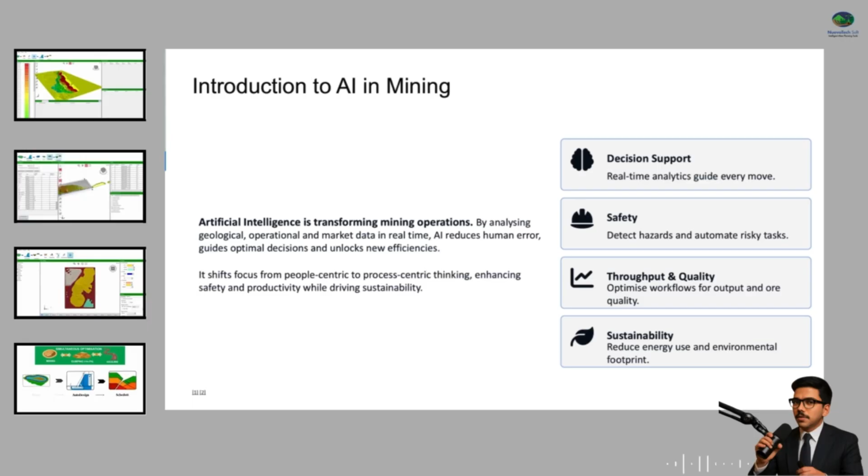We use machine learning to pattern match across geology, equipment telemetry, and market signals. Two outcomes matter: safer people and better cash flow. The rest, faster decisions, fewer surprises, smaller footprints, flows from those two.

Leaders have already proven the value. Rio Tinto's autonomous systems have cut fuel use on haul trucks by about 13% and boosted productivity with autonomous drills by roughly 10%. A reminder that smarter decisions add up at scale. And in exploration, Goldcorp's collaboration with IBM Watson at Red Lake showed how AI can highlight new drill targets alongside traditional geologists' plans.

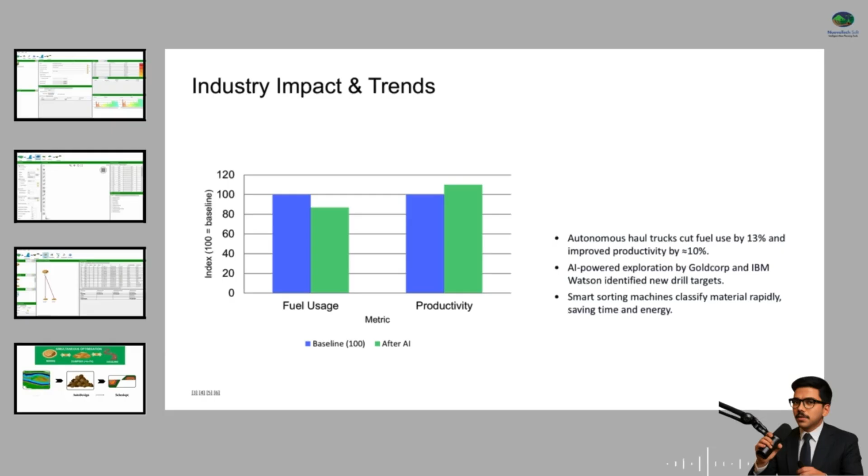Let me start with a night shift memory. Storm hits, internal dump is shut. Old me opens Excel, chaos. Now, we open SchedOpt. We regenerate paths, flip a few toggles, and the solver reroutes waste to an external dump, nudges stockpile draw to keep the plant happy, and respects gradients we set. Result: operators get a clean, updated plan before the tea gets cold. Tons, steady, zero drama.

Here's my plan for the next few minutes. I'll go from geology to cash flow in one pass, find value with PitOpt, turn shells into real designs with AutoDesign, schedule and route with SchedOpt. Stop me if I slip into jargon, I'll keep it simple.

At NuevoTech, we turn those pillars into daily practice using MineOpt, our strategic planning suite with 3 modules. PitOpt for economic shells, AutoDesign for rapid pit dump designs and mining solids, and SchedOpt for schedule optimization that includes dumping and haul, road selection to maximize NPV.

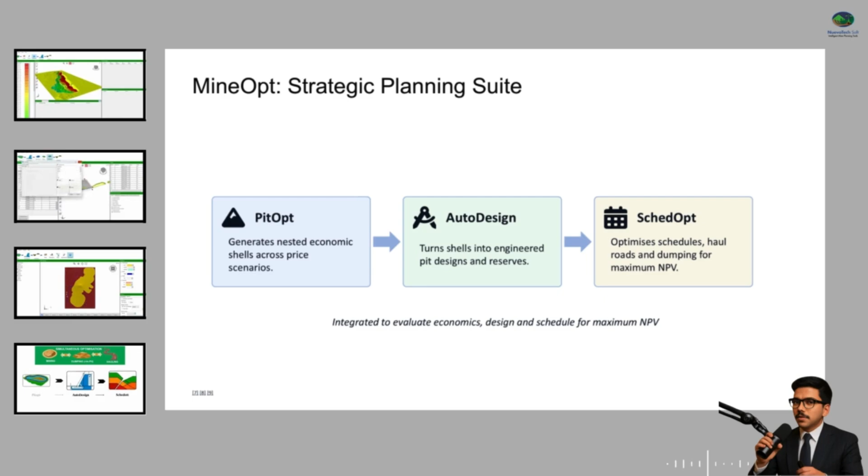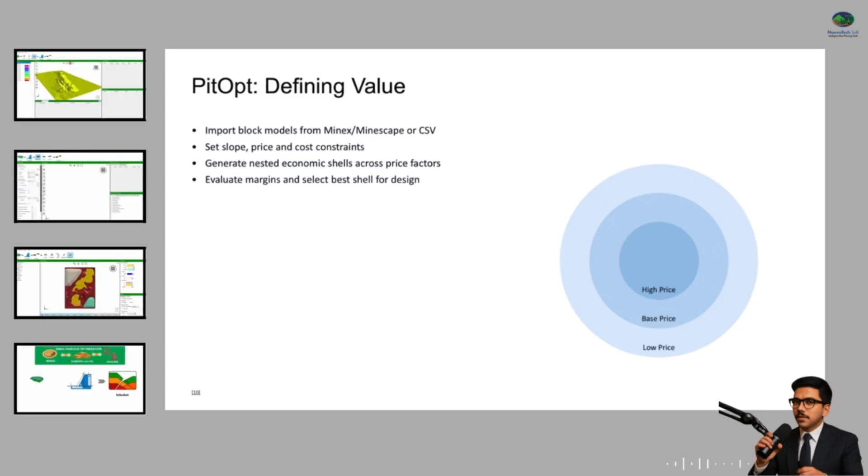I always start with economics, not geometry. In PitOpt, I point to my block model, or Minex or Minescape grids, pick density, grade, yield, and set my price, wash cost, and slopes. Then I press go. PitOpt builds nested shells across price factors. Think of it as trying scenarios quickly. What if prices dip? What if they rise? I pick the shell that balances value and practicality. That's our truth source for design.

Shells don't move rock, designs do. In AutoDesign, I choose the pit, pick the shell, and set benches, either by elevation or by seam surfaces if it's stratified. I set slopes and berms, and I always check minimum mining width so operators aren't fighting a pencil-thin ramp. Hit generate and there's your engineered pit. Next, I partition into strips and blocks, create solids, and run reserves. Now I've got bench-wise tons and qualities.

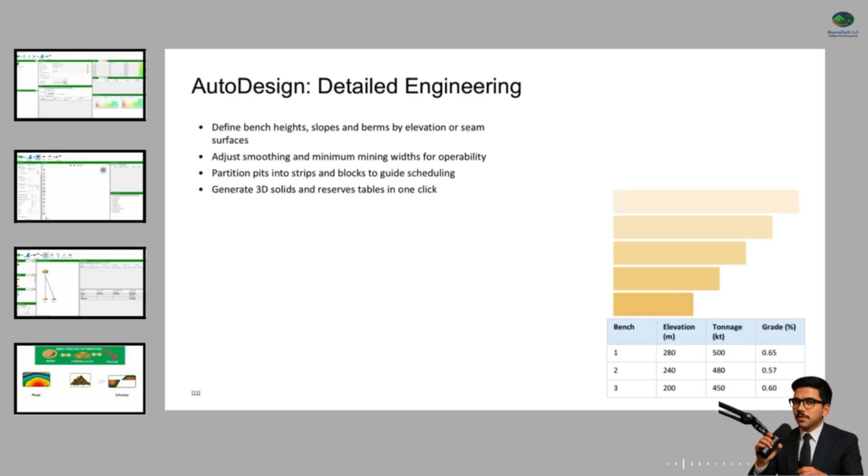Feels like switching the lights on. Time to animate the plan. SchedOpt takes the pit dump blocks and my main haul road center lines. I connect pits to dumps, stockpiles, and plant, set period capacities and economics, then create paths. The solver decides in-pit versus external dumping, which haul road per block, and how to blend into plant and stockpiles, always targeting net present value and respecting constraints like gradient and max segment distances. Hit optimize, and I get period flows, a clean cash flow, and a 3D animation. That's the real show me moment for managers.

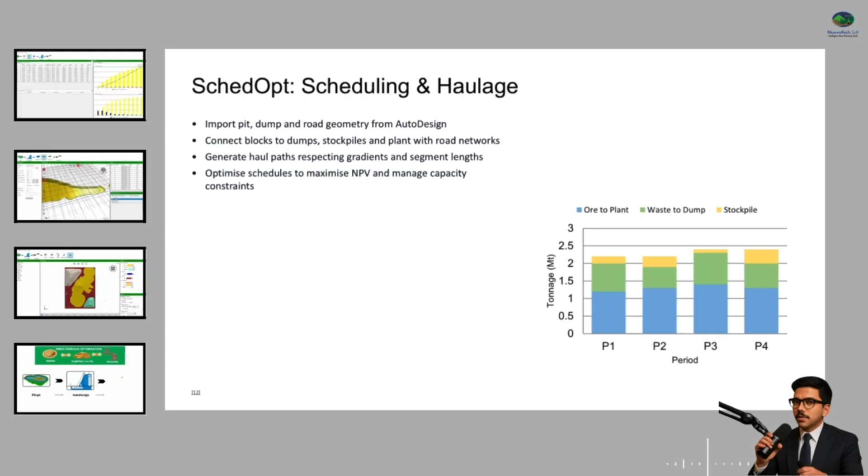Another quick story: stratified coal, decent wash limits. AutoDesign aligned benches to seam floors, and reserves exposed a small high ash pocket right where we planned to feed the plant. Rather than panic, we reblocked only that patch, pushed it to stockpile for a soft market period, and blended it back later when pricing improved. Same tons, better value. That's AI helping humans make the right trade.

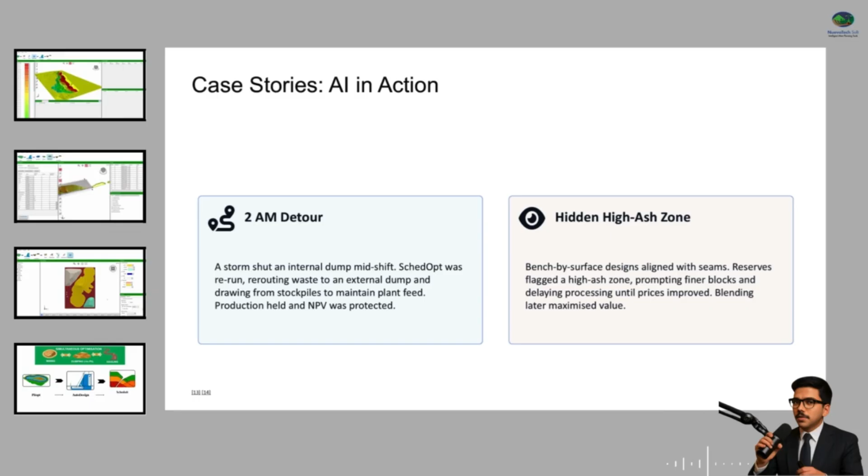At one coal client, a storm closed an internal dump mid-shift. Historically, we'd scramble in Excel and accept lost plant hours. With the MineOpt flow, we regenerated paths and re-optimized. SchedOpt rerouted waste to an external dump and temporarily increased stockpile draw to maintain plant feed. Production held, haulage stayed within gradient constraints, and we protected NPV.

On a stratified deposit, AutoDesign's bench-by-surface method aligned benches to seam floors. Reserves flagged a high ash patch early, so we created finer blocks just in that area and scheduled it to stockpile during a weak market, blending back when pricing improved. Classic AI-augmented decision support.

Outside planning, AI keeps doing helpful, boring things. Predictive maintenance, watching vibration and temps to flag a truck before it strands you on a ramp. Computer vision, proximity alerts and PPE detection help keep people safe. Smart sorting, images and sensors keep low-value material out of the mill. The magic is not one big algorithm, it's hundreds of small guardrails that save your day.

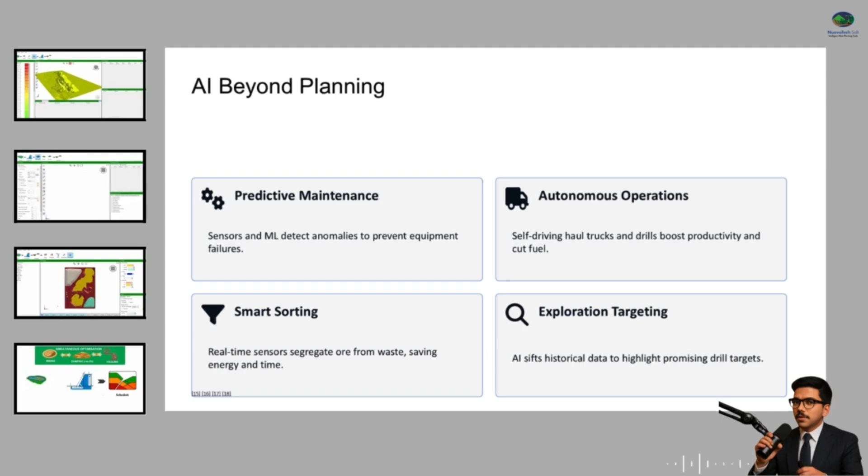Where we're heading is closed-loop planning. Your geology updates daily. MineOpt rolls those changes through design and schedule. An AI agent nudges routes and blends as the site state shifts. And you stay in control. Human in the loop, always. Your job becomes telling the system what winning looks like and checking that it's actually winning.

If you want steadier tons, safer crews, and fewer 2 a.m. surprises, this is how we do it at Nuevo Tech with MineOpt, PitOpt, AutoDesign, SchedOpt, one flow from geology to cash.